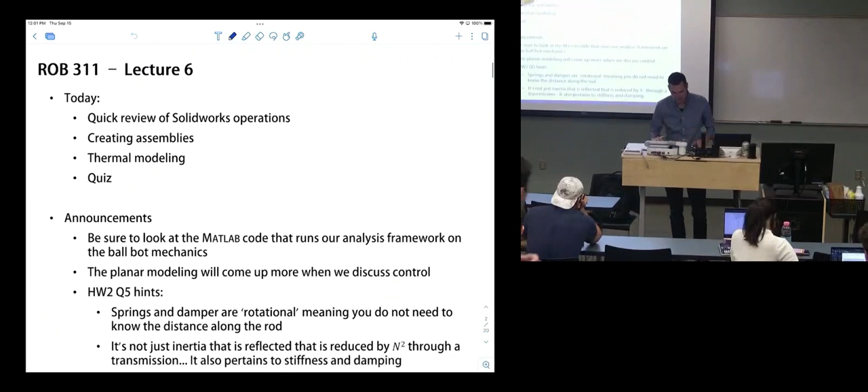This is lecture 6. Today we have a few things to discuss. We're going to quickly review the SolidWorks operations, talk about creating assemblies, which a number of you asked me about, talk about thermal modeling, and then we do a quiz.

One quick question for you guys: did somebody lose 100 pounds? I assume of British currency, in this room. Okay, if you did, or hear of somebody who did, this would be on Tuesday. They sent me a note saying someone in here or the next class lost 100 pounds. Okay, so good. I don't think it's you guys.

A couple of announcements, just quick thoughts. Be sure that you look at the MATLAB code that we talked about that does this kind of analysis framework for the ballbot. It does ballbot mechanics, it uses the motor that we selected, and it shows you the current and voltage. We went through that a couple lectures ago. Just make sure you look at it and understand how that process is what we're learning, and then we did it for the ballbot and selected the motor that was used.

I didn't spend a ton of time talking through why we selected this Pololu motor, why it has a 70-to-1. There are other options. With the motor size, really there's not much. It's the biggest motor they sell, the 37D. So that was pretty much our only option, but we could have chosen a few different transmission ratios, and 70 seemed about right. We were originally also looking at 100.

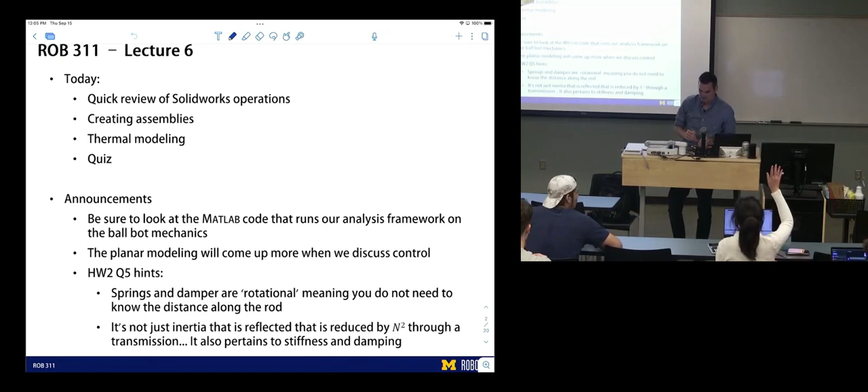For that one, do I provide all the parameters? Oh, yeah, because you did provide everything of the motor, like resistance, so I write everything, but damping? Yeah. Okay. Damping's on there. Let's add damping in there. So I'll send a parameter out. Just include it. It'll be something small, but include it just for completeness. I'll provide a version of that homework with the damping value in it. For now, just consider it to be something really small. Yeah, thanks for the heads up.

Okay, so you can model the spring and damper as a rotational element, so you don't need to worry about its linear distance traveled. You only need to worry about its angular distance traveled. And then remember we talked about reflecting inertia from the output of a transmission to the input of the transmission where the motor sees it. And we said the inertia on the output of the transmission, it sees that divided by n squared. And that came because both torque and angle were affected by the transmission ratio. So you end up getting it divided by n squared.

But that's also true for other mechanical elements, not just inertia. That applies to stiffness and it applies to damping as well for the same exact reason: their functions depend on both torque and displacement. So they will be divided by n squared. How come for this example you're saying we need to divide by n squared, but on the catapult example, when we went through the current, we didn't need to divide by n squared on that damping? There was no damping in the catapult. We still had the motor, there was damping, but there wasn't damping on the output; it was just the torque to do the lifting task.

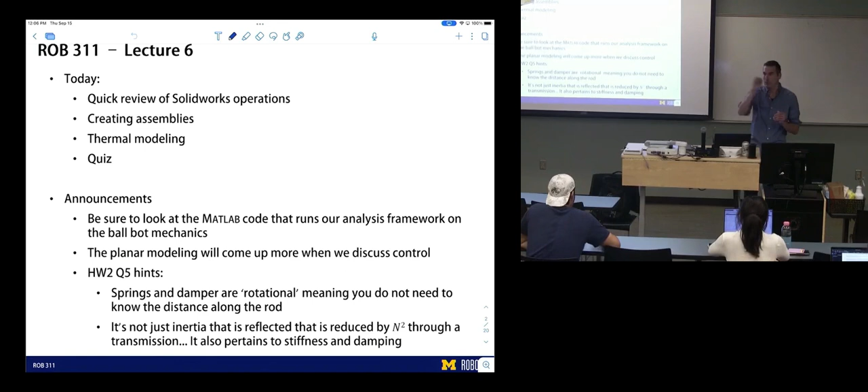Okay, so we're saying there's damping actually on the physical oscillator here? Yeah. There's a little picture of a rotational spring and a rotational damper indicating that those are on the output. So the catapult example had damping on the motor, but not damping on the output. So that's why you didn't see it there. So this one is just damping on the oscillator, not on the motor? No, it'll also have damping on the motor. I just didn't provide you that value, which I'm going to share. Does that make sense?

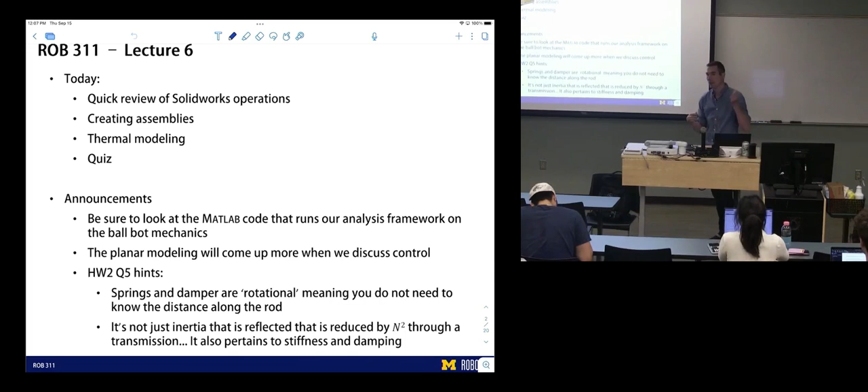So just to double check, you only do the divided by n squared when the force is acting not on the motor, it's acting on the lever arm or whatever the motor is acting upon. That's right. And it's not that it's a force, it's that it's a mechanical element, like inertia or stiffness. A force would just reflect through divided by n. But a mechanical element, where its motion produces a torque, ends up getting divided by n squared because the motion is a factor.

So just to be clear, when we're taking into account efficiency of the transmission, we would only use that for forces. Right, the torques, yep. The torques on the output of the transmission will have to be lower than the torques on the input of the transmission, so we divide by that efficiency.

Okay, thank you. Great, so that problem was a challenging homework problem, really the only one that was kind of difficult. A lot of the challenge turns out to be in the modeling, so I felt good about extending it. That gives you a couple more office hours. I have office hours today, and then Eve also. Okay. So a couple hints on homework.

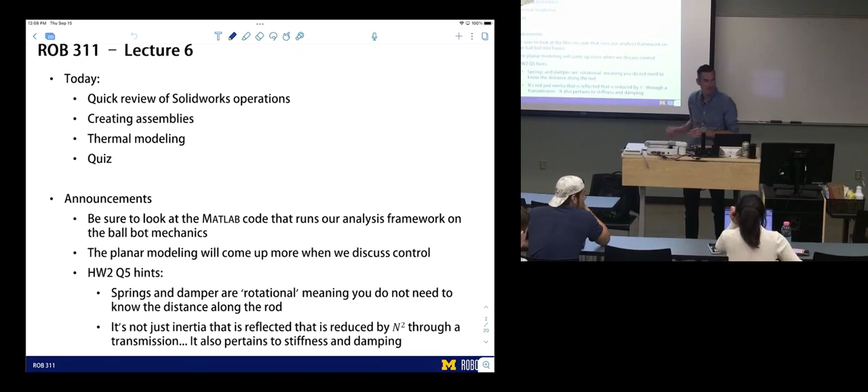Question 5. Okay, so we're just going to quickly review the different operations. Some of you are experts at SolidWorks, so a lot of this is a review for you. This class is probably not aimed at the expert. This is for people who are new to SolidWorks, and the people who are very strong with SolidWorks will just have to hang in there.

We talked about these different operations. You can create 3D operations. There's also 2D operations of sketching. The 3D operations require a sketch, and you can do things like extrude, revolve. You can loft, which will take something from one sketch to another sketch and connect it. These are just different operations to create 3D structures. If you stack them, you can create more complicated structures.

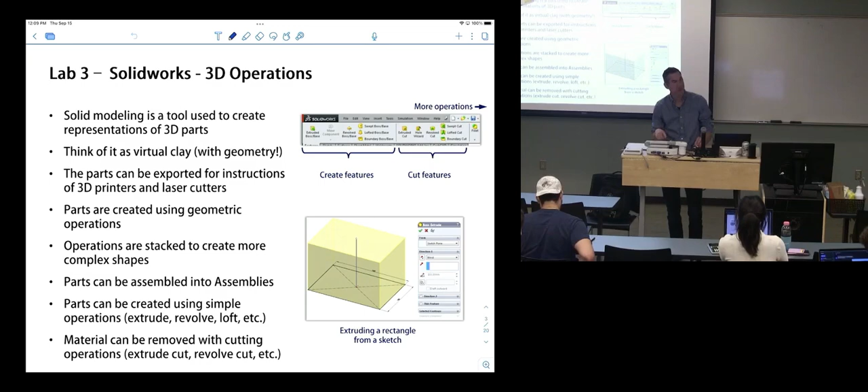There's other types of modeling in SolidWorks that's not based on these types of operations. We're not going to learn that, but just so you know they're around. There's a whole class of modeling that's based on surfaces instead of volumes. But that's pretty advanced SolidWorks. We're not going to do anything like that. So you can create features. You can create negative features or cutting features. That's how we build 3D shapes.

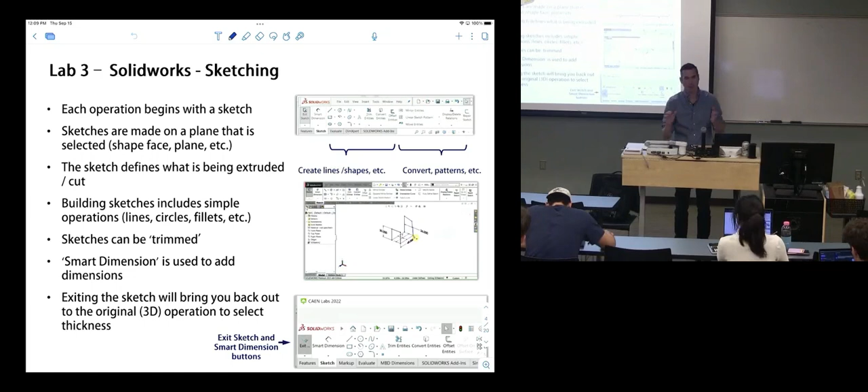Those shapes require a sketch. You guys got the hang of that yesterday. You create sketches, add lines and curves, add smart dimensions and relationships to make those sketches what you want. Generally, you want to take a blue sketch to a black sketch. What did black mean? Fully defined. Yes. Awesome.

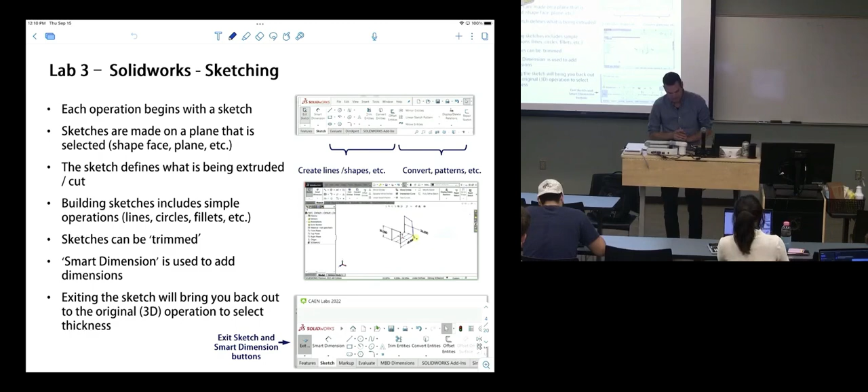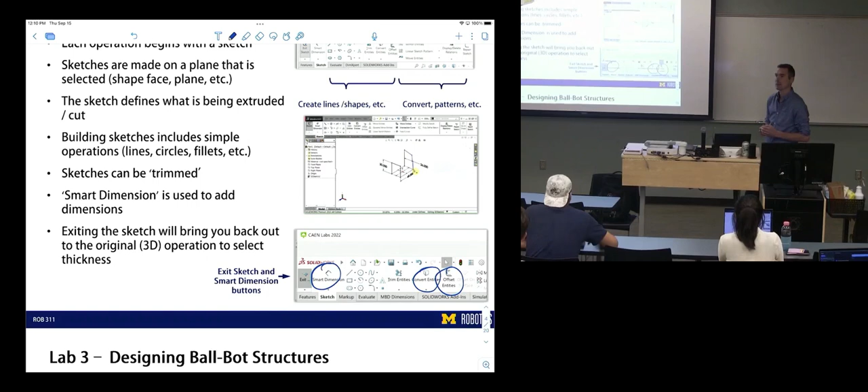We talked a little bit about this: convert and offset. Those are just really helpful sketching tools in addition to smart dimension. Yeah. So when you say things are fully defined, we had this yesterday where I would create a relation between two different lines and I would think that would fully define it, but that still wouldn't fully define it. So what does fully defining mean?

That would be, in a plane, 3 degrees of freedom have to be constrained. Okay. So it can rotate and translate. So all of the relationships have to go back to those degrees of freedom and constrain them. Got it. Okay. So sometimes it's just challenging to know how many degrees of freedom worth of constraints these operations have. Right.

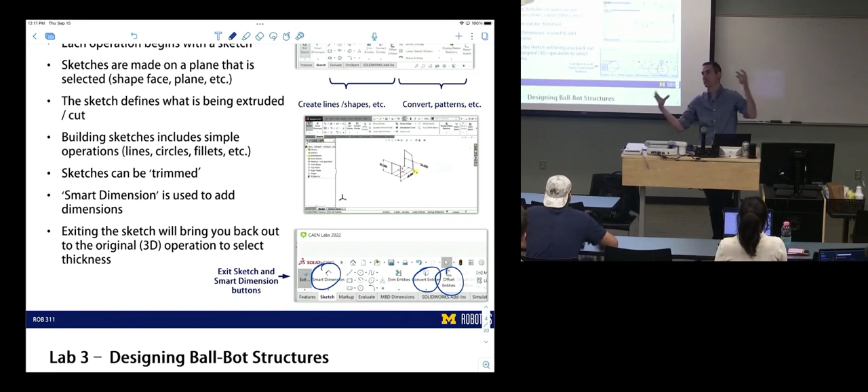So if you constrain something rotationally, that doesn't mean you're constraining it translationally. Right. And if it's blue, you can always grab it and drag it, and it's going to move. It's going to do something. It's going to change size or move around. But when it turns black, you won't be able to change it.

These were the general layout of the ballbot, the different structures, what you guys are making. I just wanted to show this again to see if there are any questions about the different components or how the ballbot's laid out. We gave you some part files to start with that I think will help you.

And then also, we're going to give you today all the other files. So for those of you who want to start making assemblies and making sure your holes are in the right spot, we'll give you these standoffs, these motors, Omni wheels, a Raspberry Pi, the battery. So we'll provide these files to you, and then you can add them when you want to. Any questions about the ballbot structure, what's inside of it, what you're making?

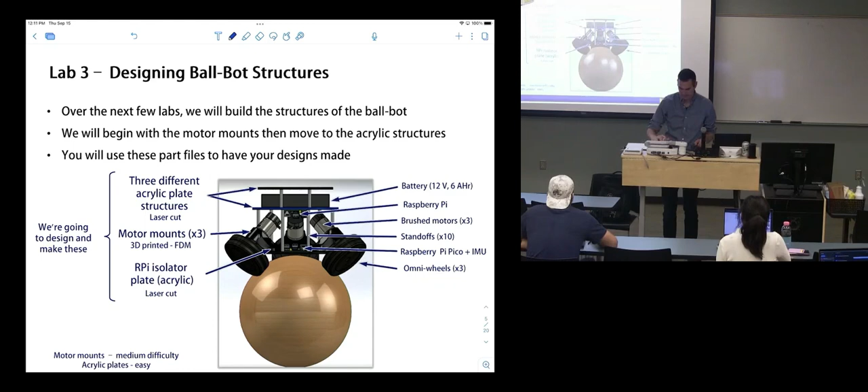Okay, so a lot of you asked about creating assemblies. This is how we do that. Assemblies are a different class of file. There's part files, there's drawings, which we haven't talked about, and there's assemblies. So when you open Solidworks, you click on this assembly, it's going to prompt you to create a new assembly. That'll be blank, nothing in it, and you have to add things to it.

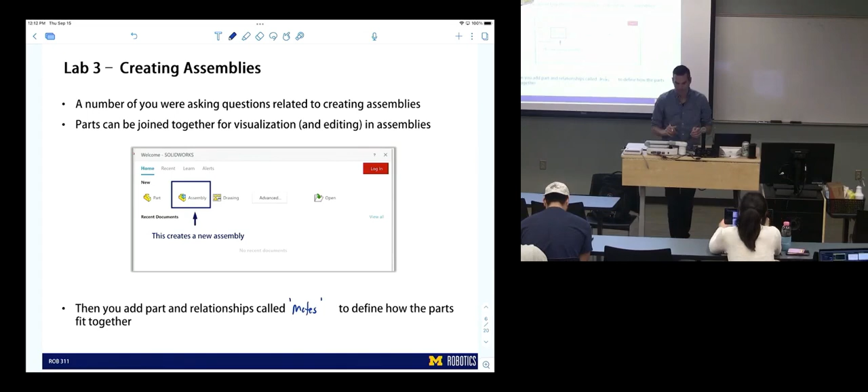When you add a part to an assembly, we have to define how the parts fit together. That's the key part of an assembly. We call those mates. So relationships called mates are added to assemblies to define how it comes together. If you create an assembly, then you have to add parts to it. There's nothing in it. You add parts by clicking Insert Component. It'll bring up this dialog. You select your component, and then it'll insert it into the assembly.

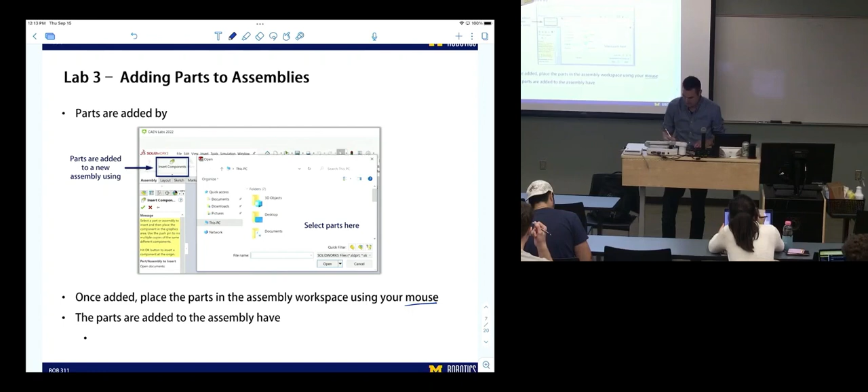Once it's inserted, you're just placing it. Your mouse will be able to place it anywhere. You click your mouse and it drops it in the assembly, but it has no constraints or relationships. So it still has 6 degrees of freedom. So once added, place it in your workspace using your mouse. And the parts added to the assembly have 6 degrees of freedom natively. Without constraints on those 6 degrees of freedom, they're able to move around.

The first thing you put in there, I think, is locked. And everything will have relationships to that first part. And then there's a difference in coordinate axes from that first part to the assembly, which has its own axes. You can align those if you want. But I think once you insert your first part, everything will sort of align to that first part. So the constraints added, or I'll say mates.

Mates have to constrain all 6 degrees of freedom, unless you want your assembly to be able to move.

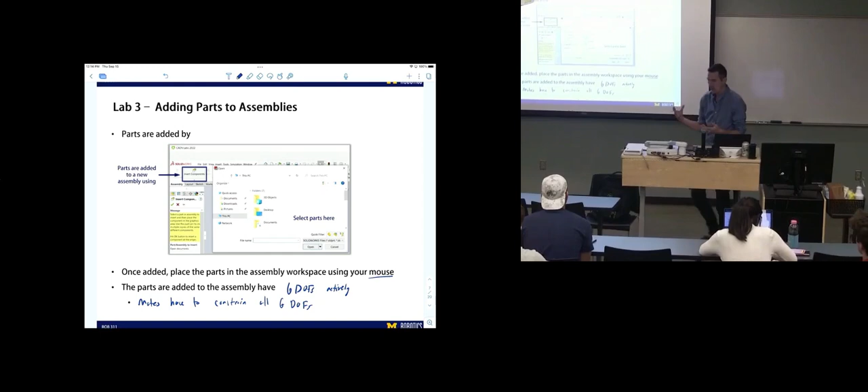So you'll end up adding mates that constrain 6 degrees of freedom. The way SolidWorks adds mates isn't by degrees of freedom directly, it's done by intuitive relationships, which is actually super helpful.

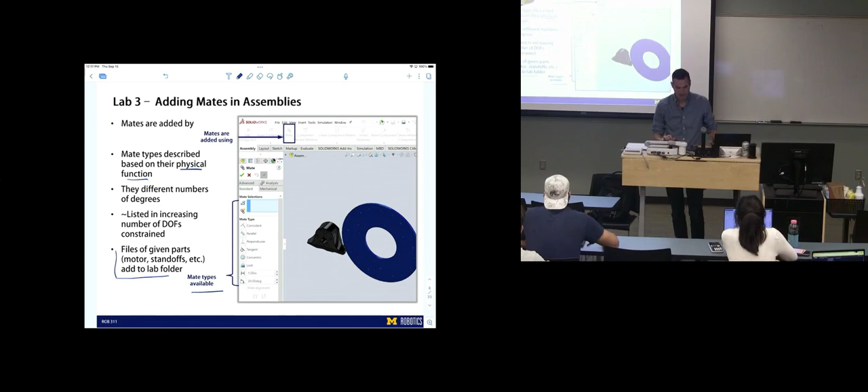Okay, this is the end of our review. Now, let's talk about where we are and progress to thermal modeling.

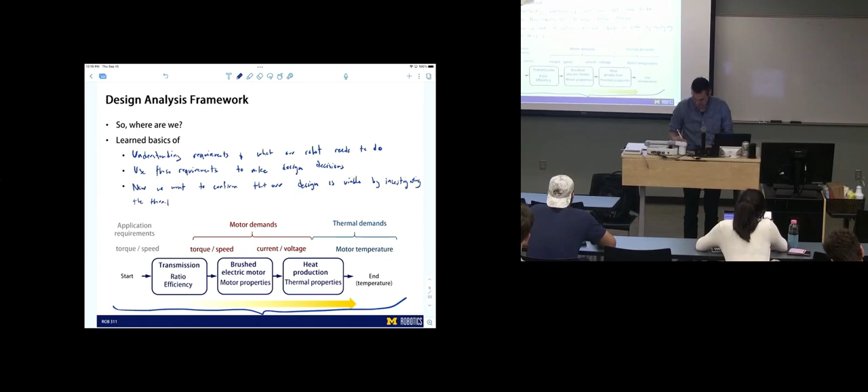Where does this thermal input come from? Why are we talking about thermal response? Thermal input — why is it getting hot?

It's coming from the resistance of the motor. We're getting joule heating — I squared R loss is called joule heating, that's another name for it. We have joule heating from the motor's windings.

There are rules of thumb to shortcut this analysis, which we'll look at at the end, where we'll do a steady state analysis.

Why are we learning this prediction of winding temperature? Because it's relevant to system designs where mass is an important factor.

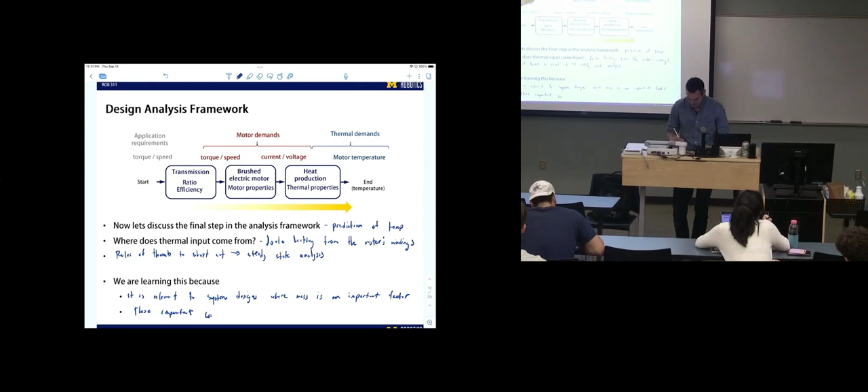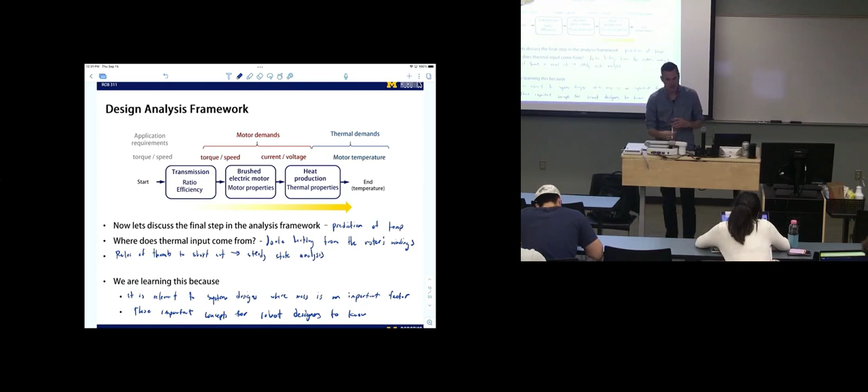And these are important concepts for robot designers to know. That's why we're learning this. I think this is important stuff. It's a little bit of physics, a little bit of engineering, but it's good stuff. It's important stuff for people who work in the design of robots to be very familiar with.

Okay, thermal modeling. We're gonna kind of go through this. We got 4 or 5 slides on different thermal types. It's a crash course in heat transfer modeling.

Heat flows, so it's generated by the windings. It's going to heat up the windings. So heat flows from windings to the housing to the atmosphere. So our modeling of heat transfer has to understand how heat's flowing. Windings, housing, it's going to heat up the metal of the motor, and when that motor heats up, it's going to send that heat to the atmosphere.

There's 2 types of heat transfer that we're going to learn: conduction, convection.

What's conduction? Anybody know? It's sort of on the screen. Conduction is like when it spreads across the surface or like the metal. Yes, so this is conduction. It's heat flowing within a material. So we heat up this bar, heat's going to flow to the other end. It's happening through a process called conduction.

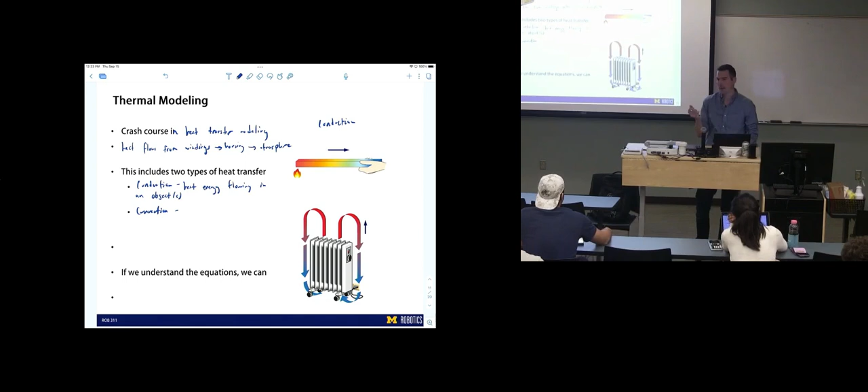Like heat energy flowing through like a fluid. Yeah, that would count. So like this is convection here. Fluid is air. So what happens is it heats the air up, that air rises, it pulls cool air in. That process just continually repeats itself. That's convection. That's a different process. That's not heat flowing through a material. That's heat coming off into the atmosphere.

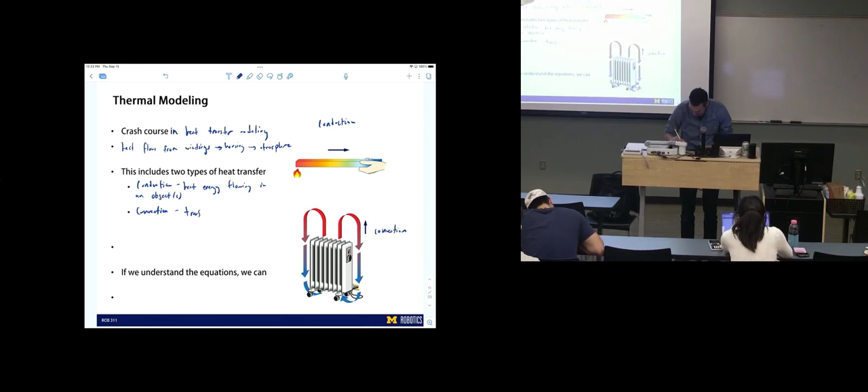This is transfer of heat energy between an object and the environment. What's awesome about this is that both of these forms of heat transfer have the same governing equations. If we understand these equations, we can then predict winding temp rise. And that's what we're going to do.

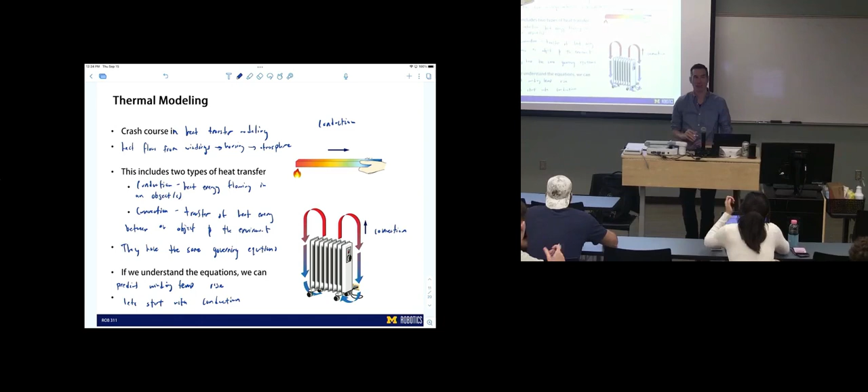Let's start. Conduction. So let's learn the governing equations for conduction. Okay.

Conduction, we're going to say heat flux, Q of T, in watts. Also called thermal power. That's I squared R, it's a power loss from the winding resistance, that's the current or heat flow. Q comes from I squared R loss.

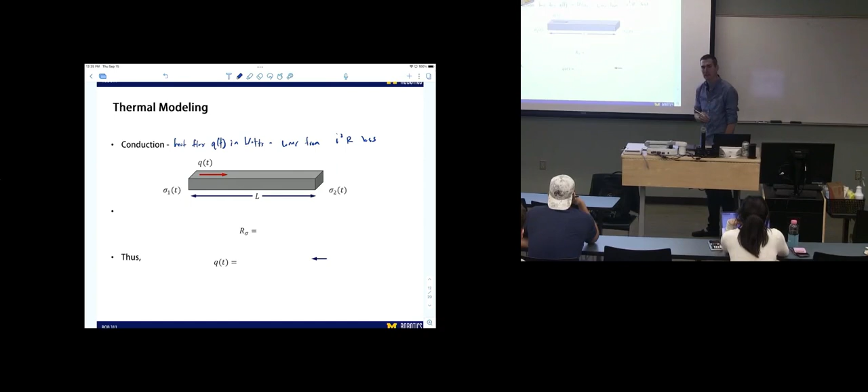So we have a bar. Let's consider a bar of length L, temperature sigma 1 on one end, temperature sigma 2 on the other, heat flowing from one side to the other. In this class, we use sigma as temperature because T is like torque. So we're going to use sigma. So anything that has a sigma is a temperature concept.

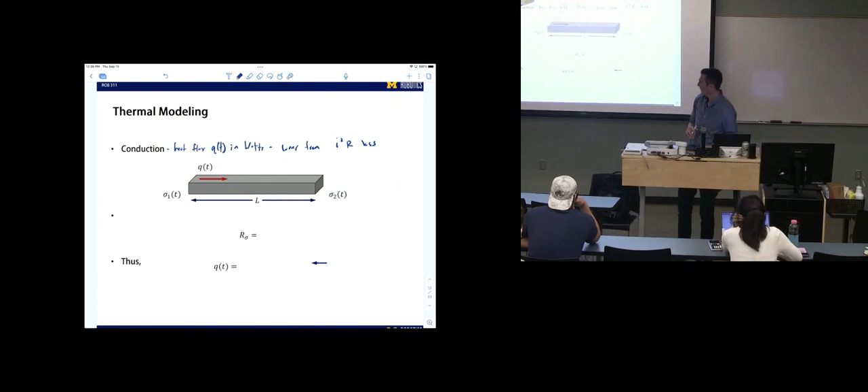There we go. Okay, that was weird. Okay, so to talk about how heat flows, to understand these governing equations, we need to know a little bit about the thermal physics. So the property that describes conduction is the thermal resistivity. So thermal resistivity, this is in K per watt, degrees Kelvin per watt.

Is below, using thermal conductivity kappa, which is in watts per meter Kelvin. So the thermal resistivity, R sigma, would in this case for this bar would be L over A kappa.

So this is saying, okay, this is the thermal resistance of this bar. Heat is going to flow in this bar, but it's going to flow based on resistance, like thermal resistance provided by the physical properties of the bar. What are the units of kappa? It's watts per meter Kelvin.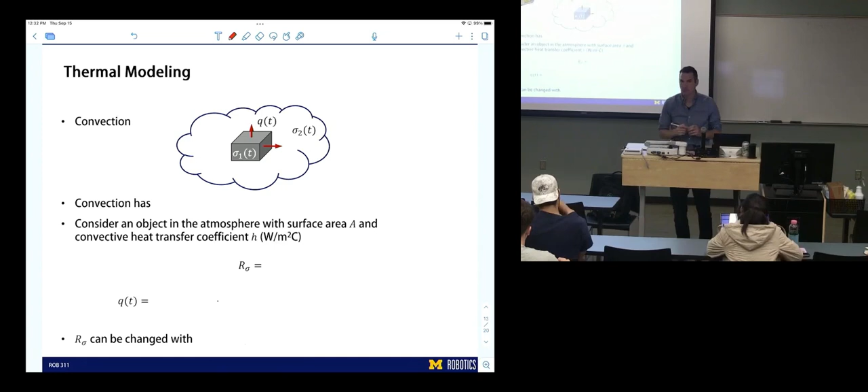Convection has identical governing equations. So where do you think this is going? It's going to Ohm's law. We're going to get there a slightly different way. Consider an object in the atmosphere with surface area A and convective heat transfer coefficient H. So instead of the thermal conductivity kappa, we have a different material property governing the flow, or the thermal resistance, in the case of convection: the heat transfer coefficient H. So in this case, R sigma, our thermal resistance, is 1 over HA.

Do I want you to memorize this formula or relationship with this cube? No. But what I want you to understand is that heat flows through a different mechanism, not conduction but convection. It has a thermal resistance, just like conduction. I want you to understand that that thermal resistance is governed by these properties and can be used to predict temperature.

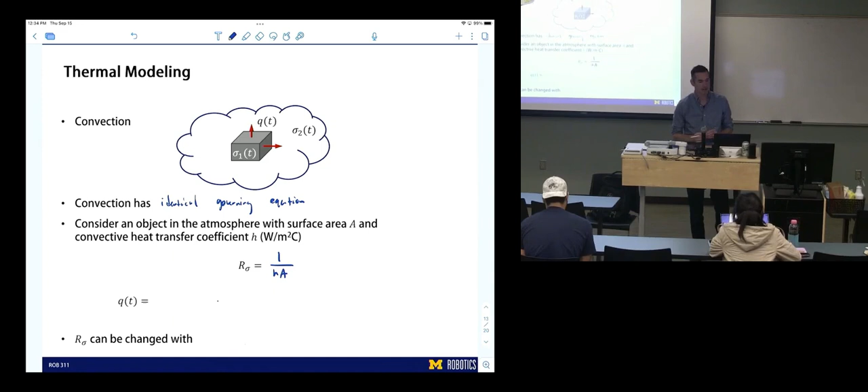Is the convection heat transfer coefficient dependent on the fluid it's surrounded in, or on the material that is radiating? Great question. Which do you think? I think the fluid surrounding it. So if I take this object and instead of having it sit in air, I have it sit in water, it's going to transfer a lot more heat, agreed? The density of the water will pull a lot more heat. So it depends on the fluid, but it also depends on the material. If it were styrofoam, it would have a much harder time conducting that heat into the water, but if it were metal, it would be a lot easier. So it's dependent on the situation of the heat going from the object to the atmosphere.

So to know the coefficient, we have to know both the material and the fluid we're putting it in. Do people have to calculate it for every combination, or is there another way? The way we find this out—we'll get to this part—we wouldn't try to calculate it or model it this way. We would determine it empirically. No one really ever tries to model it from material properties.

So Q is still going to be sigma 1 minus sigma 2 over R sigma. Same thing.

Okay. R sigma for convection can be changed. Agreed? We just talked about how we could change it by soaking the system in water instead of air.

What's another way to change it? It's really common: increasing the surface area. And what do we call something that does that? We have a name for it, it's a noun, a thing that does exactly that. I've got another word for it, like a heat sink. Yeah, it's common. R sigma can be changed with heat sinks.

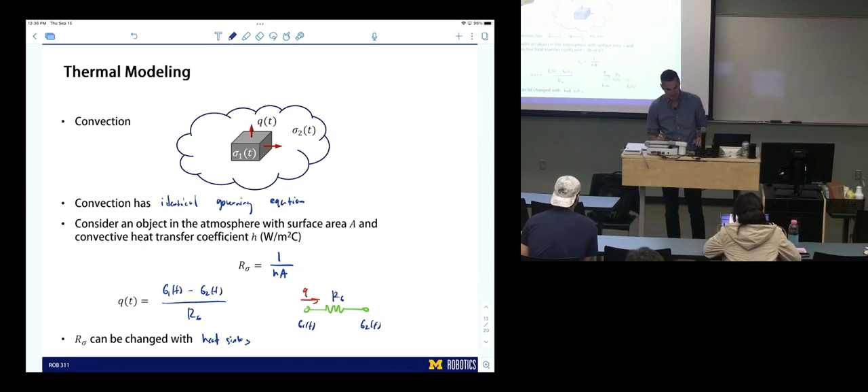Okay, one more element. It's not just heat transfer, we don't have just these two forms of heat flowing. We have to talk about one other thing, which is heat storage. So thermal capacitance is the term that we use to describe this, sometimes called thermal mass, and it describes an object's ability to store heat energy.

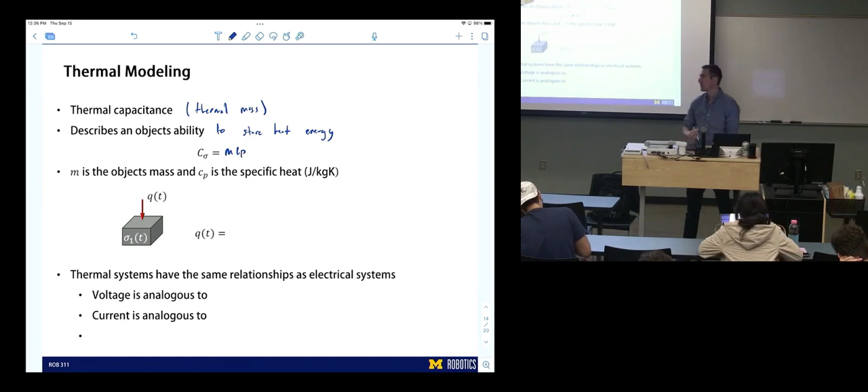Its thermal capacitance, C sigma, is mCp. So heavier objects store more energy, store more heat energy when they're heated up. That makes sense. And then Cp is the specific heat of the material, so that's the material property.

So we have this object here, we're heating it up, we're going to put some heat into it. And we want to describe, what is this governing equation? It's capacitance. Any thought about what this has to be? Anybody know? If I solve for Q, it's going to be C sigma d by dt of theta 1 of t.

Let me draw that as an electrical circuit. Okay, so this is the electrical circuit that describes the dynamics of a thermal capacitor. This is a current source, so here in this electrical circuit we have a current source charging a capacitor. If we wanted to look at the temperature of this object, we would look at the voltage here.

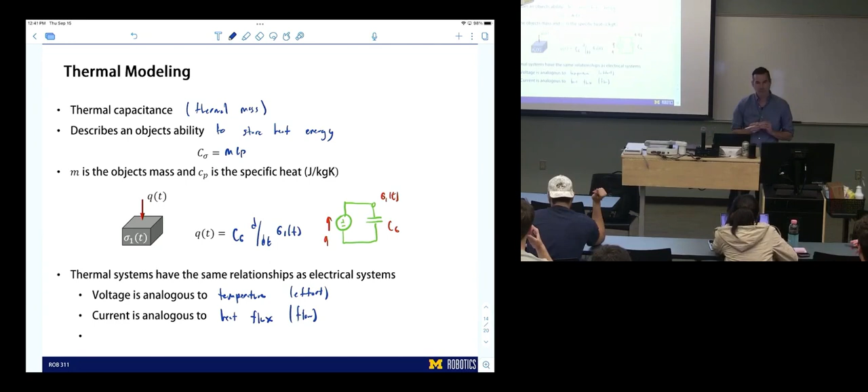Current is the resulting flow that comes from an effort, same as heat flux and velocity. A student asks why voltage was earlier compared to velocity. The instructor explains that in a motor, the governing equations swap effort and flow — the motor equations use the effort variable in the flow equation and vice versa — but efforts are still efforts and flows are still flows, and the product of both is still power.

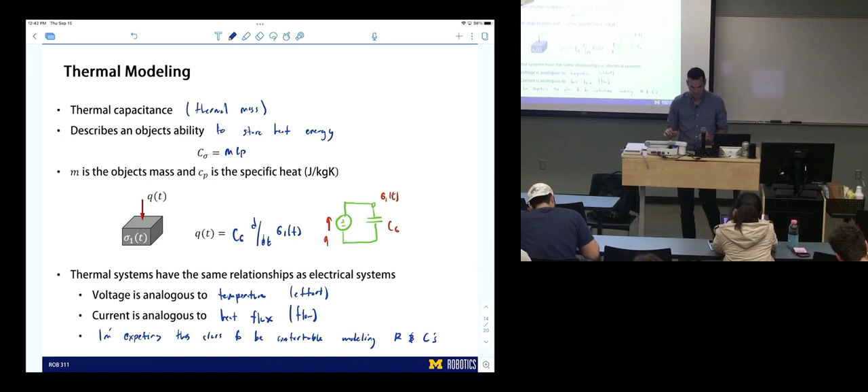I'm expecting this class to be comfortable modeling resistors and capacitors.

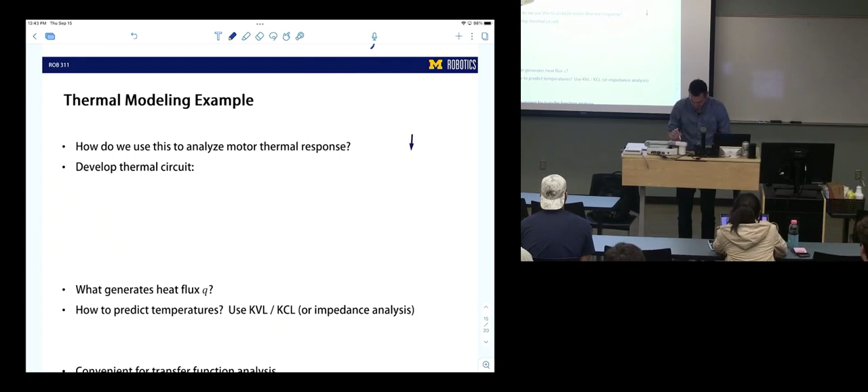How do we model a thermal response? Now I want to do an example with you where I show these equations and put them to work in an example that models a motor. So how do we use this to model motor thermal response? We're going to develop a thermal circuit. I'm actually going to... it's going to take a second.

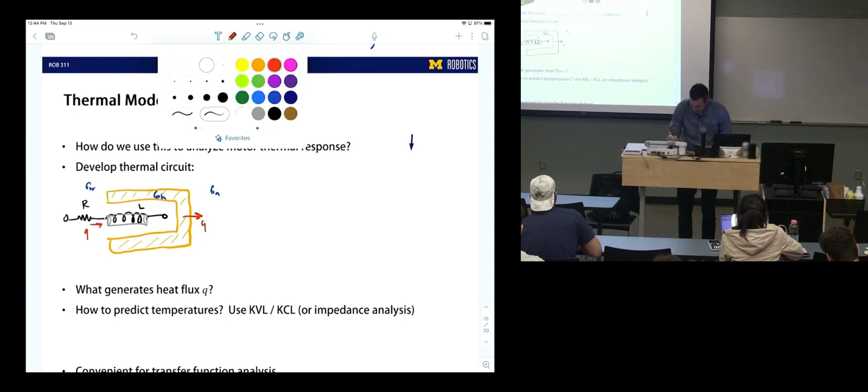So this is my model of a motor, our motor thermal model. We have a winding in black, with a resistance and an inductance — we're not using the inductance for this. Inside that inductor is a copper core that's heating up, so the joule heating comes off the windings and heats up the steel or iron inside the motor, which is around the windings. That heat flow flows out from there, heating the housing, and that flows out into the environment. This is the housing, this is the windings, so heat flows from here to here, into this thing, and then from here to here into the ambient.

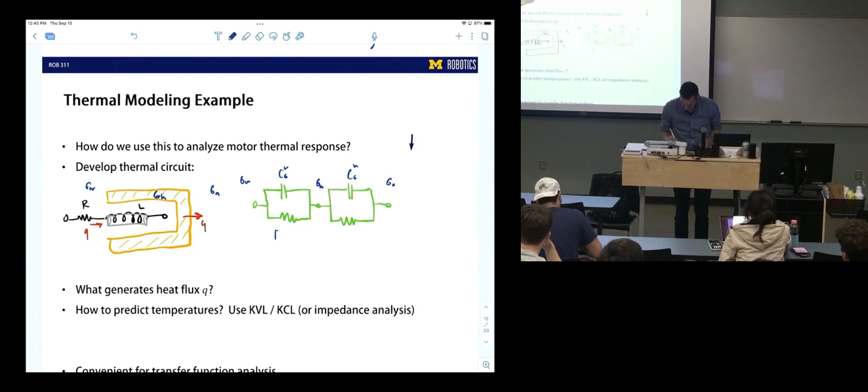So if I want to draw this as a thermal circuit, I'll draw a simplified version — it might look like this. This is sigma winding, sigma housing, sigma ambient. This is C sigma winding, this is C sigma housing, this is R sigma winding-housing, this is R sigma housing-ambient. So all we did is use our original tools: conduction and convection are resistances, and mass heating up and storing energy is like a capacitor. Now let's create a thermal circuit that models this full system.

We have the winding temperature at this voltage. We have a mass — that's the mass of the copper of the windings — and its thermal resistance describes heat flow from the windings to the housing. We have the temperature here, the housing temperature, and the mass of the housing with its thermal resistance as heat flows from the housing into the atmosphere. We have the temperature of the atmosphere.

I usually do this: I set this temperature equal to 0. What effect does that have on these temperatures, or voltages? It makes them relative to ambient temperature, so now it describes a temperature increase above some reference, not absolute ambient temperature. If I set this equal to 25, everything is in actual temperature units. If I set it equal to 0, it's easier to manipulate the equations, and now it's a temperature rise.

What generates heat flux? I'm pretty sure you're with me here — I squared R. Is that R an electrical resistance or a thermal resistance? Electrical. Okay, so how do we predict temperatures?

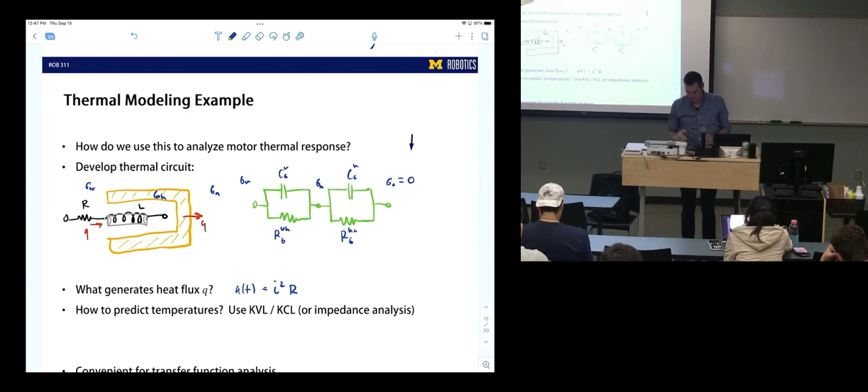This set of equations will be a little more challenging to analyze, but I'll show you how to analyze them — this is a simplification. Normally this capacitor, if this were a true model, would go to ground, not here. But it's a bit more convenient to analyze it this way, and it's very close. So how do we predict temperature?

You can use this governing equation. You won't have to solve this — this is the time domain version of the equation. I basically solve both of these for Q and set them equal. This could be rearranged to solve for the temperatures, and then you could find the solution to the differential equation. I'm not going to do that, but that's how you would solve it.

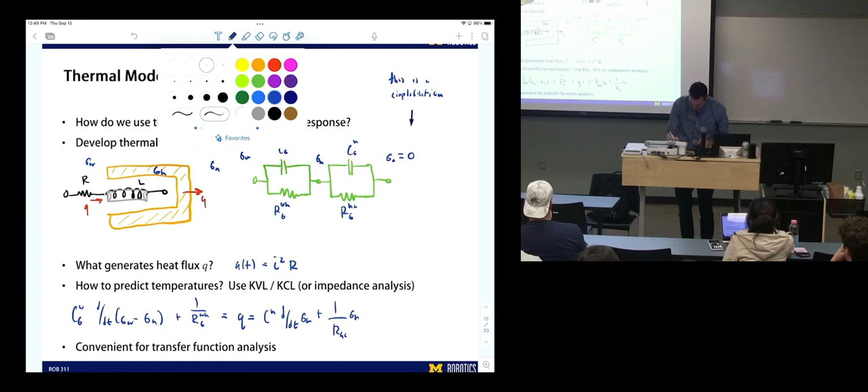This guy? Yeah. That's C, sigma W. That's this. Here, I'll do it in pink. This guy is this guy. Yeah. What are the two different R's? The two different R's are like one, this is conduction, this is convection.

Okay. So this R is describing the literal flow of heat from the windings to the housing by physically touching and being part of the same material. So that's conduction, but they have the same governing equations, they're still resistors, but this is a resistor describing convection, a flow of heat out to the atmosphere, yeah.

I thought the capacitors, excuse me, not the conductors, were the things that were kind of showing the convection, because isn't that what we said was equivalent? No, the capacitors are showing the actual heat up of the metal. Okay. And when the metal heats up, it stores energy. Okay, so we're having the winding and the housing storing up. That's right. This is the mass of the housing, this is the mass of the windings.

It's driving those. Which do you think will be slower and which one do you think will be faster? Who thinks the housing will be slower? Who thinks the windings will be slower? I don't know, half of you answered. The housing will be slower because it's heavier. You remember what governs those properties? The mass was a big factor.

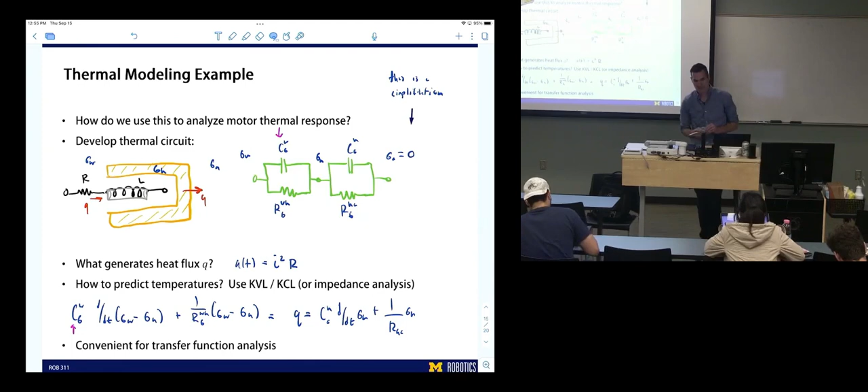Yes? Sorry, one more question. So on the left-hand side, why is it 1 over R instead of sigma W minus sigma H over R? What are you saying? Like on the left-hand side. It really should be, I forgot to write this. Oh, okay. Oops. It really should be that. Thank you. Okay.

Let's say you want to model these things. Where do we get this information? It comes from motor data sheets. This is an example motor data sheet from a company called Maxon. Maxon makes outstanding motors, both brushed and brushless. This happens to be a data sheet for a brushless motor, but all of the concepts are the same. All of the information is listed here.

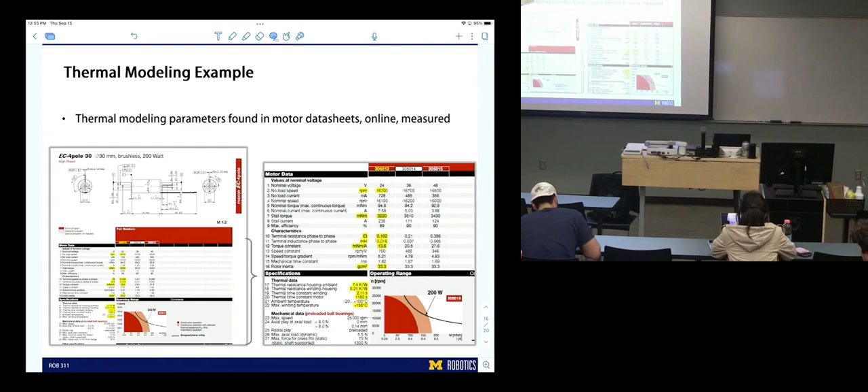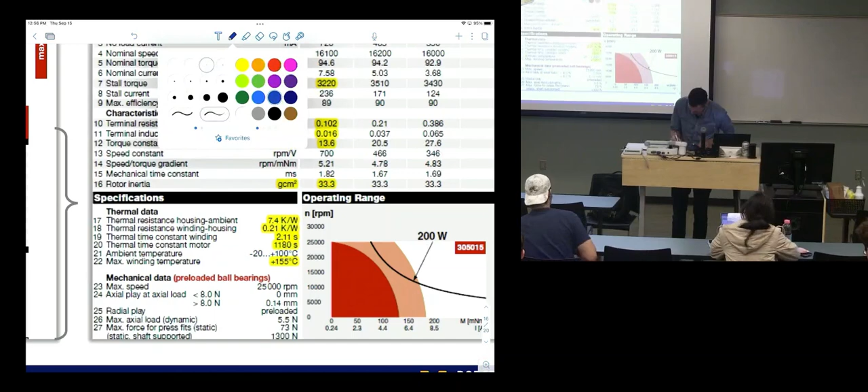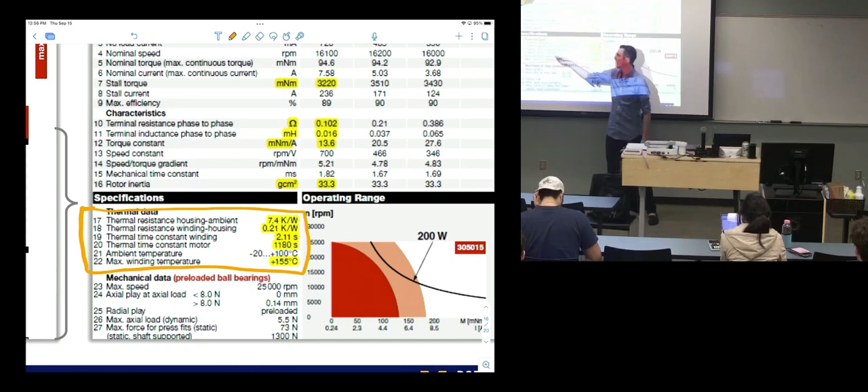If I blow that up, let me see if I can zoom in. You see this? This tells us all the information that we just talked about. Thermal resistance, housing to ambient. Thermal resistance, winding to housing. Thermal time constant, winding. Thermal time constant, motor. Max winding temperature, 155 degrees C.

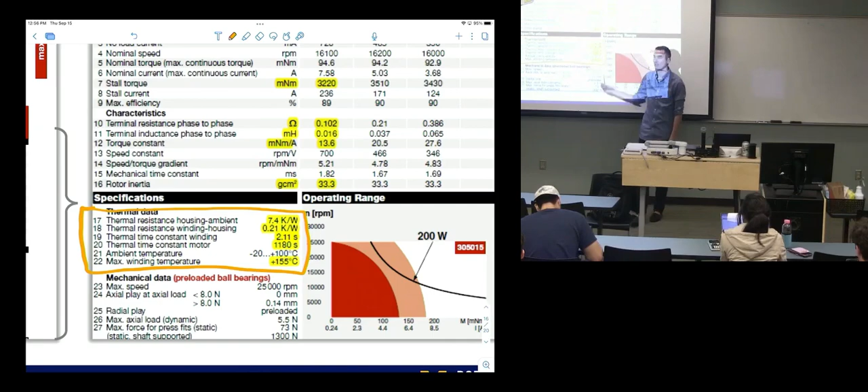Okay. Now I want to show you an example, but before I do that, I want to talk you through something. These analyses can be completed in Simulink using transfer functions really easily. So I've uploaded this file for you, so you can use it if you're interested. It is the exact Simulink model of the problem we just drew on the board. This is a transfer function that governs the winding housing temperature. This is a transfer function that governs the housing ambient temperature. This sums them together because it's basically two systems in series. And then this tells us the winding temp.

What you can do is pattern match. These are of the form R sigma over R sigma C sigma s plus 1. There should be an S there, so I'll add that later. So this is also the same thing as R sigma over tau s plus 1, where tau is the time constant. In that Maxon data sheet, it didn't give us the capacitance. It gave us the resistance and the time constant, so it's setting you up to use this type of analysis. So 2.11 right there, that's the time constant from that data sheet. 1180 seconds, that's the other time constant.

As an example of the difference in the time constants, or the time it takes to heat these systems up, the winding time constant's around 2 seconds, so it heats up much faster. The housing time constant is over 1,000 seconds. What does that tell you if you want to judge your temperature by feeling the motor's housing? Is that a good way to get an understanding of the system's temperature? No. It'll be 1,000 seconds for you to be able to feel the right temperature.

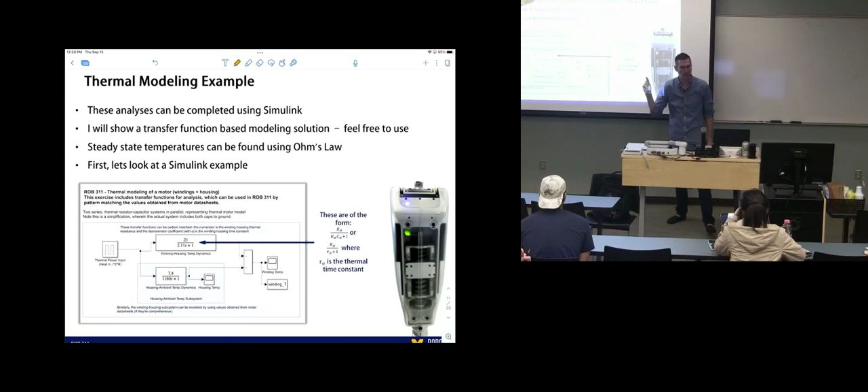I want to show you this. Okay, so this example comes from this robotic knee that I built when I was a postdoc. This analysis uses the motor that's inside this knee, and then it uses a thermal input, which I want to describe, that's geared to that situation. So this analysis came from the development of a robot, in this case a robotic knee prosthesis. So we have to go back to the question of what we wanted to do.

So I created a thermal power input, this square wave pulse generator, but this is I squared R. I just happen to have it in this pulse train format. I got the I number from about how much current it uses each step. So the pulses are like step, swing phase, where it does very little.

Step pulls the body up, that's a lot of torque. Then it goes to swing phase, it does very little. So I used a kind of a pulse train to represent when it's doing a lot of work and when it's not doing much. That's just a way that I represented that to give you an idea. And if we look at the housing temp and the winding temp,

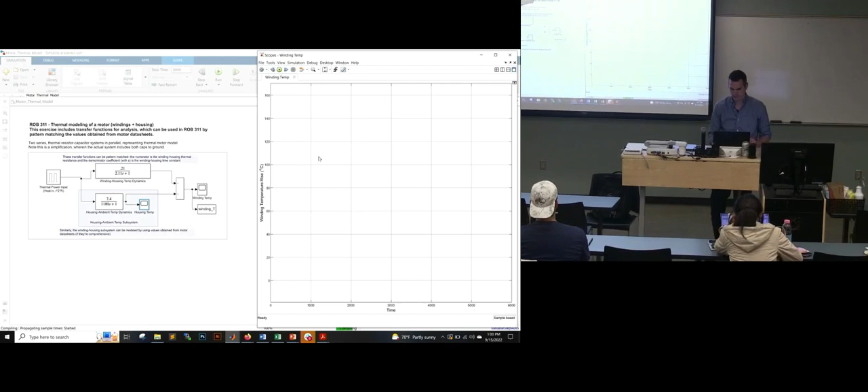it's going to show me the temperature increase from 0. So this is temperature rise, it doesn't include ambient. So we have to add 25 degrees C to this to get the ambient temperature. And it shows how it heats up over time. If we look closely, we see it look like this.

What's going on there? Anybody know? Is it the stepping? The stepping. So what we're seeing is the step: it rises really fast because that time constant is only 2 seconds. As soon as it's starting to apply power, its temperature is increasing. Then it went to the place where it was not doing anything, so then it starts to cool. Then the next step occurs, it rises, then it starts to cool.

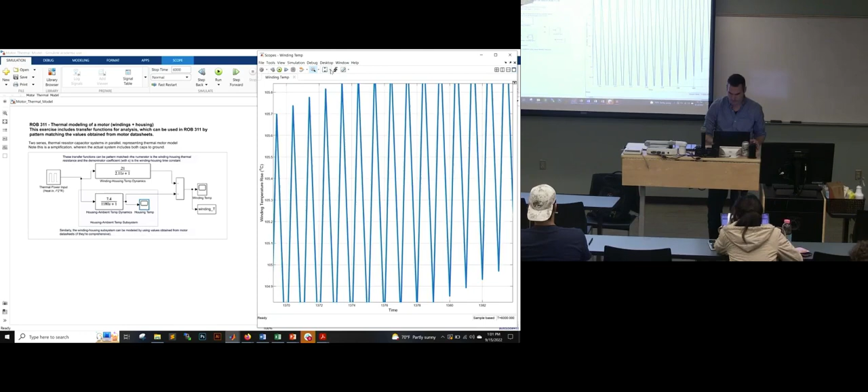But if we look at it far enough zoomed out, it looks like it's just a regular response. We don't see the stepping at all. What would this be if there's no stepping? How could I get this plot with no stepping? What are we really looking at here? If your input was just flat, but like half the height of the amplitude.

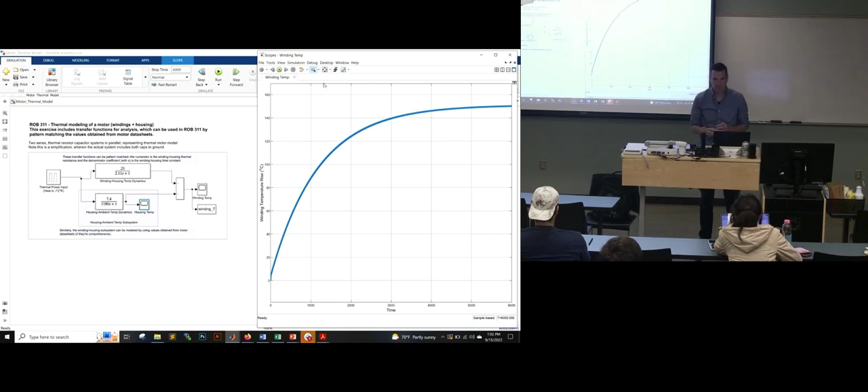Yeah, so looking at the step response to the mean of that stepping signal. So this is essentially like a step response: if we just turned on the thermal power, how the system would heat up. Okay, so you have access to this. You can use it by pattern matching. You'd have to look at the way the equations are laid out in the notes and then insert your values there, if you wanted to do this.

I think this is something good for you to know, but I won't require you to actually do anything with the capacitances. Okay. Cool little MATLAB demo.

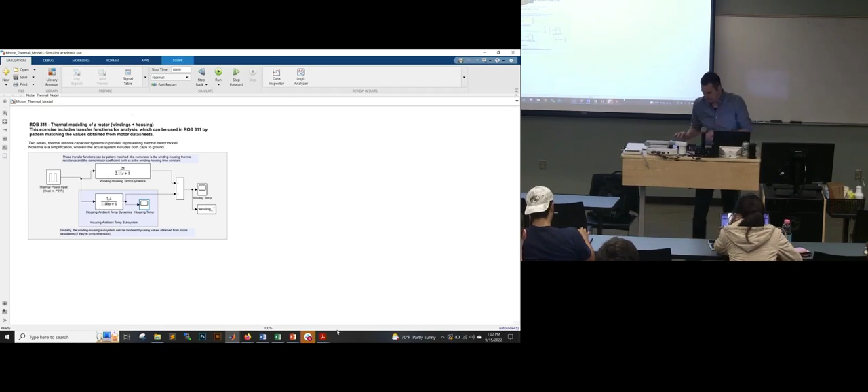Now I also want to show you, so like what happens if we don't, let's see. What is it doing? All right, there we go.

Okay, so what happens if we don't know? These thermal properties are not commonly reported. So a lot of times we don't know these. Only Maxon reports them that I've seen, but most motor manufacturers don't. So if we want to understand these properties, we might have to determine these values ourselves. And I just want to show you a quick video of how that might go.

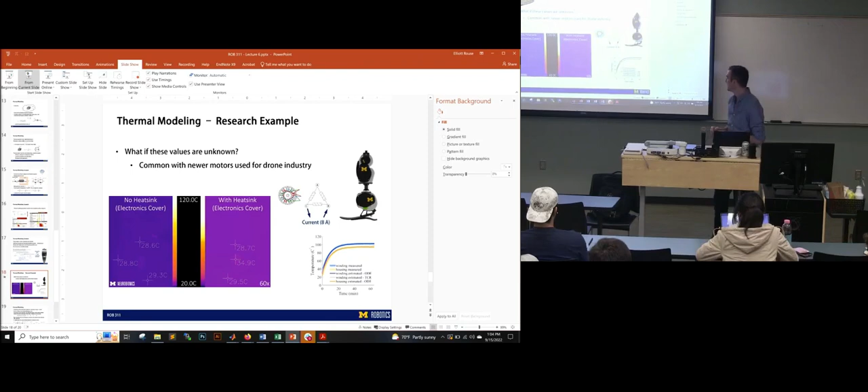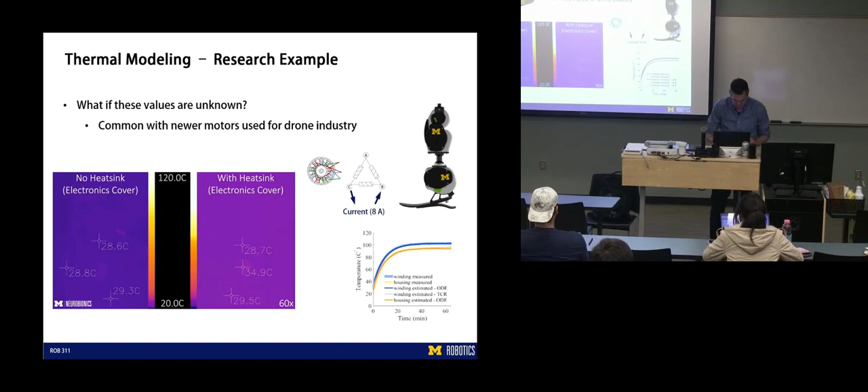Okay, so what we did here was take a motor and just run 8 amps through it and film it with a thermal camera. When we filmed it with a thermal camera, we can measure its temperature rise. And you'll see this, it makes a really cool pattern. So we're measuring this particular motor. It's the first motor in that motor sheet that I gave you.

It includes all of its thermal properties because we determined them. We look at temperature as a function of time. We looked at fitting the same thermal model we just looked at based on the temperature data we collected. And that's how we obtained the values for the thermal resistance and capacitances. So it heats up pretty slowly.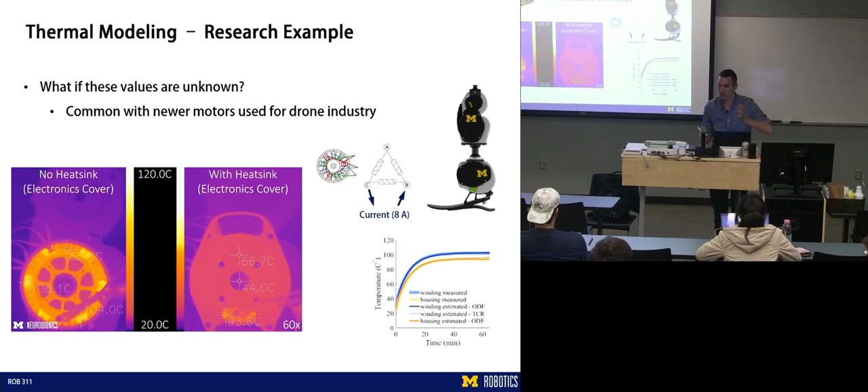But this is kind of neat. So we did this, we published these values, and I think it was really helpful for a lot of people. But if you really care about designing this way, you might have to do that sometime. Also, a lot of these values are not provided. Okay.

This is kind of like what you will have to know. This is taking this analysis and removing some of the parts that are more challenging, and you will have to know this. So data sheets often provide the max continuous torque or current.

So a data sheet might provide this. Remember when I said at the beginning of the lecture, there are some shortcuts or rules of thumb that enable you to do this more quickly without that level of detailed analysis. If you make sure that your current always stays under the max continuous current, or the torque stays under the max continuous torque, you're good from a thermal perspective. That's what they're trying to tell you by giving you those numbers, so you don't have to do an analysis like this.

So if you do that, your design will work. If you peak past the current, how long defines continuous? Like if you peak up above it for 2 seconds, then go back down for 10, and then back up for 2. Continuous is saying that if you look at the thermal response in those conditions, it will never cross the maximum winding temperature, so the continuous current can run forever without overheating. It's usually the maximum value, and if you go higher than that, it will over time rise above their maximum permissible temperature.

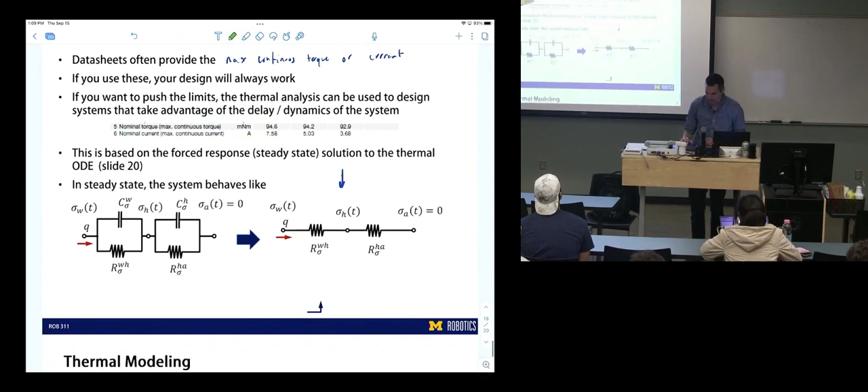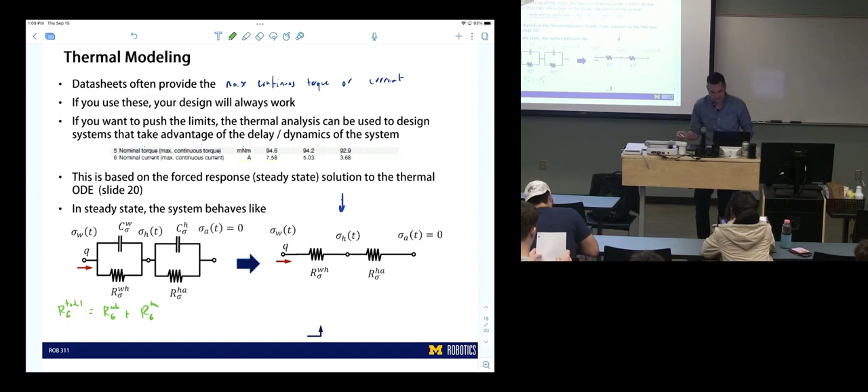So now we can do the same exact sort of set of equations. This is what you'll have to know. So R sigma total is going to be R sigma WH plus R sigma HA. Since they're in series, we just add them together, and now we have a total resistance. We know the delta sigma, so the temperature rise is going to equal Q of T times R sigma total. So now if I want to know what is the temperature change across the entire circuit, I can just use the current and the resistances to understand that.

So there'll be a temperature drop from here, and a temperature drop from here. If I combine them, I can get the total temperature, or I can look at the individual temperatures. What would be the analogous state of a steady state thermal circuit? What does that mean when the capacitor is full? It means that the temperature of the metal has become the same temperature as its surroundings. It's no longer heating up anymore. It's gone through that entire process.